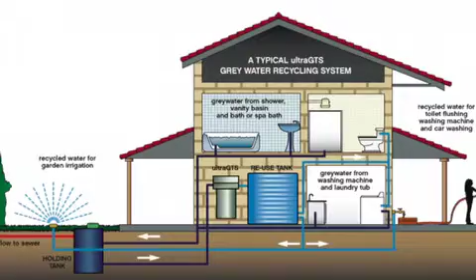Okay. And just to begin with, really, what is Blackwater? Well, Blackwater is all your water from the sink, which contains fats and different other soaps and so forth, and also sewage. That's what Blackwater is. Okay. And how does Blackwater recycling work? How does the system that you install work? Okay, the package treatment plant is all concrete. It's broken into 5 sections, and it holds about 7,100 litres of water.

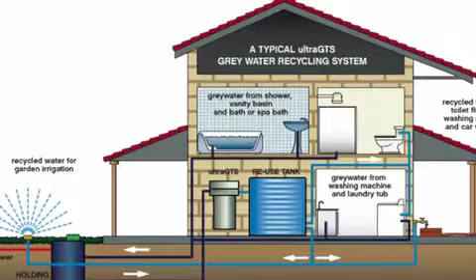So all the water from the house, from the showers, toilets, washing machines, kitchen sink, comes down into the treatment plant. It comes into the first section of the tank, which is around 3,500 litres, and if you can imagine a household bucket and you put a big divider panel in the bucket, the first side where the inlet comes in, all your grey water and sewage comes in there. While you're going to the toilet, you produce a solid, and in that solid is a bacteria called anaerobic bacteria, and that anaerobic bacteria grows by the billions in that septic chamber, and it eats up all the fats, the hairs, and any soaps, liquids within that chamber.

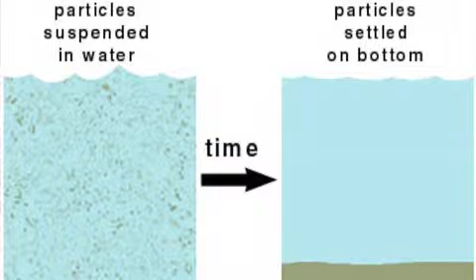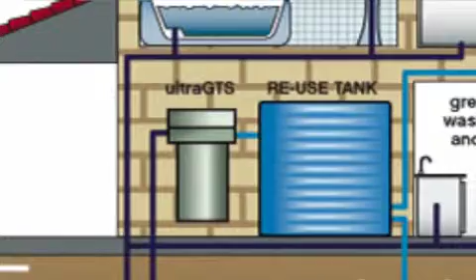It then runs from there into what we call a 2/3, 1/3 baffle. And if you've ever distilled beer, ginger beer, anything you've distilled, you'll see that the heavy liquid falls to the bottom, light comes to the top. That light liquor then flows to the other side of the bucket. And what we do is we have a small compressor that sits on top of the tank in an electrical box, and it pumps air down into the second section of the wastewater treatment system, and it creates an aerobic bacteria. So all the bubbles create a bacteria called aerobic bacteria, and as the anaerobic slowly comes through from one side of the chamber to the other, these bugs eat them all up, and they love it. So basically they'll eat them all up, they actually purify the water, and that side of the chamber where it bubbles away should be nice and clean.

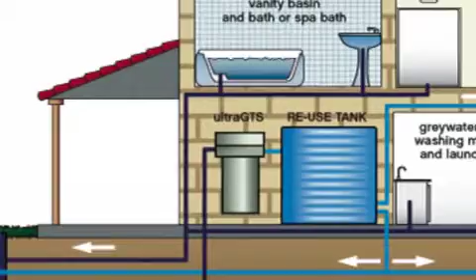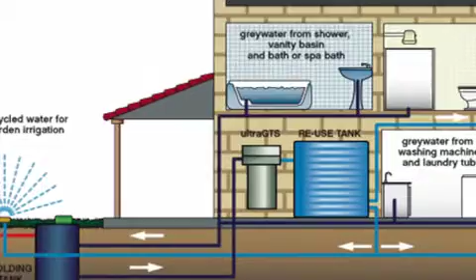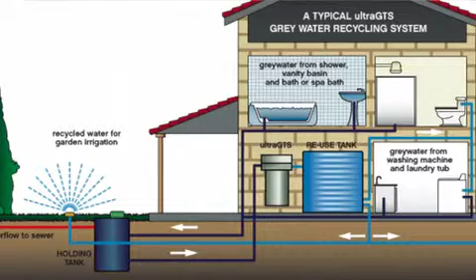It then flows into a clarifying chamber, which is a lot smaller chamber, around 300 litres to 350 litres. And we have like a venturi in there, which is made out of PVC pipe. It takes a little bit of air from the air blower that sits on top of the tank, and it sucks any sludgy mud off the bottom and skims any rubbish off the top and throws it back to the septic to be re-eaten. It then flows through a chlorinator. That chlorination unit, the water flows through it. There's chlorine tablets in there. And as the water flows through the chlorine, it actually kills any bacteria that's left over that hasn't been killed through the aerobic and anaerobic process.

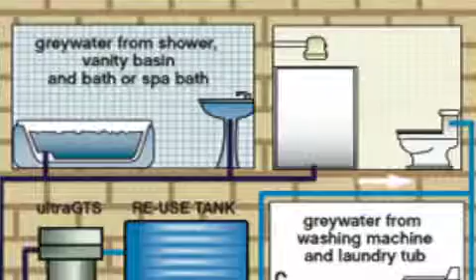That chamber runs about 350 litres, but depending on where the pump float level switch is set, when it gets to about 80 to 90 litres, it pumps that treated effluent out into an irrigation area that we install into your backyard or front yard, depending on the council regulations relating to creeks, dams and so forth. There's regulations on how far you have to be away from creeks and dams.

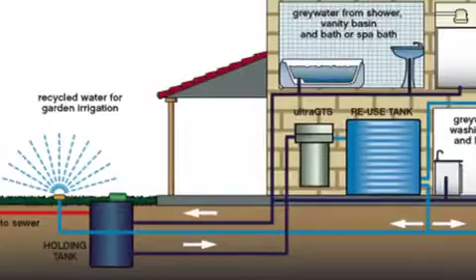So what we do is we provide a subsurface irrigation, and it's drip irrigation. We put it in with a special machine, a Posi-Track, which is like a bobcat, and a vibrating plough. We pull the irrigation in under the ground, and when we're finished, you basically can't even see where the irrigation's been put in.

When you go to the toilet, have a shower, or do a load of washing, everything goes down into the treatment plant. It's totally processed and pumps out automatically under the ground. So Dad can go out and put the ride-on over the lawn, the kids can kick a soccer ball around, and that's the end process.

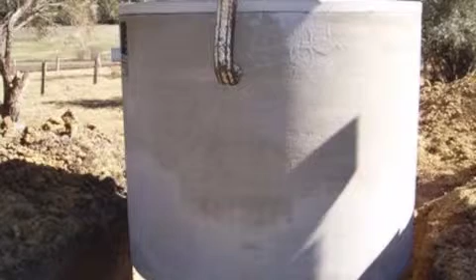And is it good for the garden, this irrigation system? Yes, it's pretty good. You can have subsurface up to 3 metres of the house, but if it's spray irrigation, you've got to be 15 metres away from the house. So you can't really have gardens close to the house like many people do in mainstream sewered areas, but you can set up areas of gardens away from the house. It's very good for the garden and very good for the lawn.

And does it smell at all? No, there's no smell if the process is working well. There's 4 manhole covers on top of the tank, so you can take the lids off and look in, and there's no smell, as long as people don't use hospital Domestos, Napisan, Exit Mould, anything that kills bacteria, don't dye their hair at home, and don't put anything unfriendly down there. The system will work very well. It'll be crystal clear, and you won't have any problems with it or smells.

Can anybody have one of these systems installed, or does it matter where you live? It certainly matters where you live. You can't install one in a metropolitan area with Hunter Water, like in Newcastle, or Sydney Water; you have to hook to the sewer. But anywhere outside the regional sewer areas, like a lot of places in Penrith and out on the northern beaches, there's pockets all over Australia, just outside the cities, that need these wastewater treatment systems.

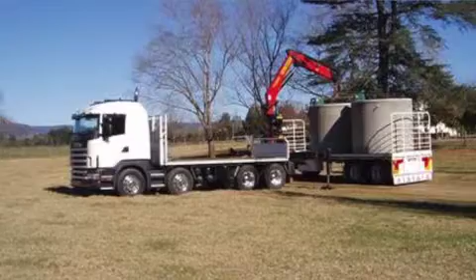And are they hard to look after? We have a maintenance program, which is council and state government regulations. We have to service the system 4 times a year. It runs about $300 a year. We go there every 3 months, and that includes all the chlorine replacement, cleaning filters, and checking everything.

And we supply a certificate of completion, what we call a QMR, to the customer, and we also supply that QMR to the council to say that it has been maintained. Okay, so it's about $300 a year to look after.